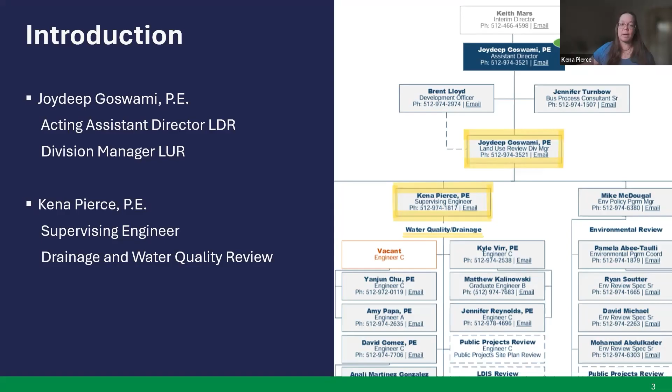More specifically, drainage review for development applications. My team does site plans, subdivisions, zoning, building permits, exemptions, site plan corrections - we do it all. I've got a team of about 13 people, if you count public projects and land development... they're called land use people now, not the old LDIS. I can't remember their new name, which is my bad. But I have about 13 people, and drainage is our gig.

So what is drainage review? Basically, drainage review is compliance with Title 25, Chapter 7, which is aptly named Drainage. What we do is we look at all the rules in Title 25, Chapter 7, and we figure out, is your development meeting those rules?

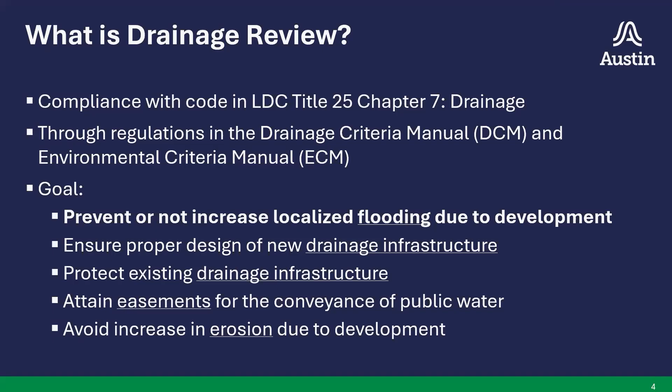Back to drainage review. So we're looking at compliance with Chapter 7, drainage, and a lot of the ways we evaluate whether you're meeting those requirements of the code is through the DCM, Drainage Criteria Manual, and the ECM, the Environmental Criteria Manual rules.

The goal of drainage review is to prevent, and this is really important, increased localized flooding due to development. It's very specific, due to development. We do not want to increase localized flooding. That implies there is flooding. There is some localized flooding in Austin, and we are all aware of it.

We also want to ensure proper design of new drainage infrastructure, specifically public infrastructure, and protect existing drainage infrastructure. We work to attain easements for the conveyance of public water in drainage infrastructure most of the time, and we want to avoid increases in erosion due to development.

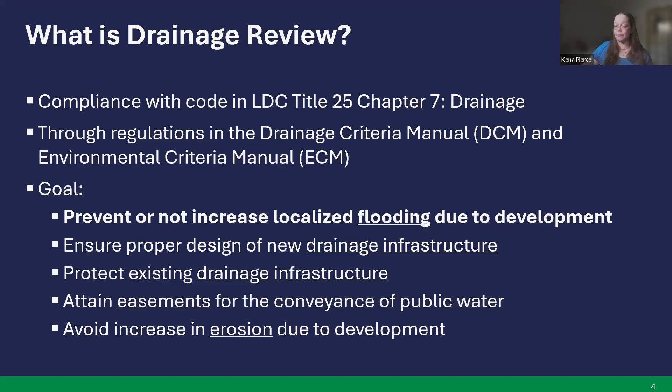This is a lot, right? I'm going to focus on the first goal that I have bolded, basically preventing or not increasing localized flooding due to development, for this particular presentation.

So we're focusing on flooding, and you're like, how does flooding happen? Well, this is the Development Academy, so most people are here because they understand that when you develop a property, you're going to build something and increase the amount of impervious cover on the ground. Most of the time - sometimes you can redevelop a property that already has impervious cover, but we're going to talk mostly about increasing impervious cover - that results in a lower amount of water infiltrating into the soil, which causes water to come off the site in greater quantities and at greater speeds.

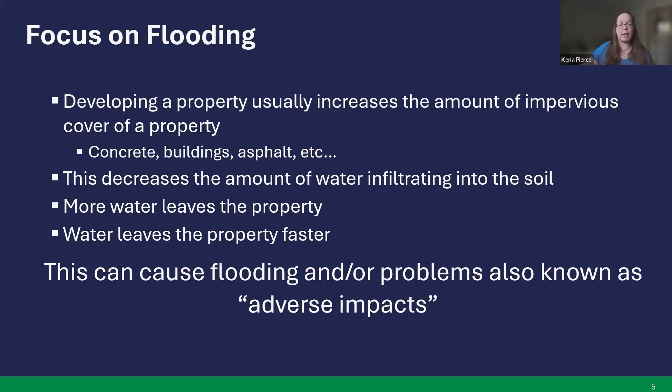Drainage review is pretty complicated. I just wanted to point out, there are some other groups that do something, and you're like, isn't that also drainage review? Yes. There's floodplain review. So if you have a property that has a floodplain on it, which is basically a creek with 64 acres of drainage area, that's another team that reviews that. My team coordinates with them, but that team is floodplain review, and they're housed in Watershed Protection.

There's also the Regional Stormwater Management review team, also housed in Watershed Protection, and we have to coordinate with them a lot. But all of these teams, we basically regulate drainage using the DCM and ECM. So it can be a bit confusing, but if you don't know who to email, email me and I'll send you in the right direction.

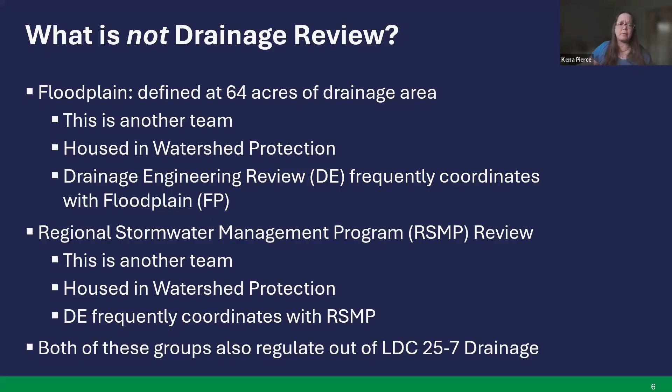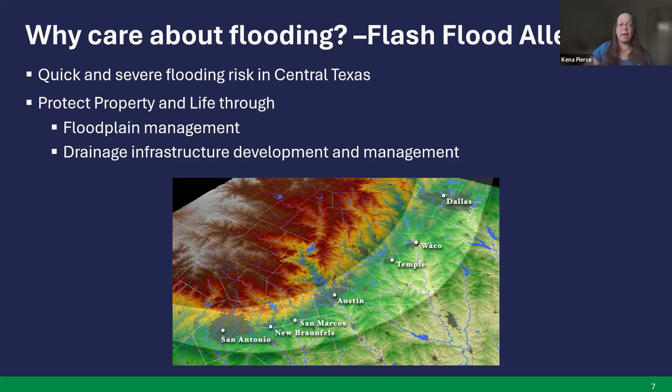Why do we care about flooding? We care about flooding because we live in Flash Flood Alley. This beautiful town we live in has steep topography on the west, which causes water to move really fast downgrade. We also live in an area where we have these really intense rain events - we get a lot of rain in a small amount of time. This quick and severe flooding risk has an area in Texas called Flash Flood Alley. We really want to make sure we're protecting property and life through managing these storm events, managing floodplains, and making sure we develop in a responsible manner to where we protect property and life.

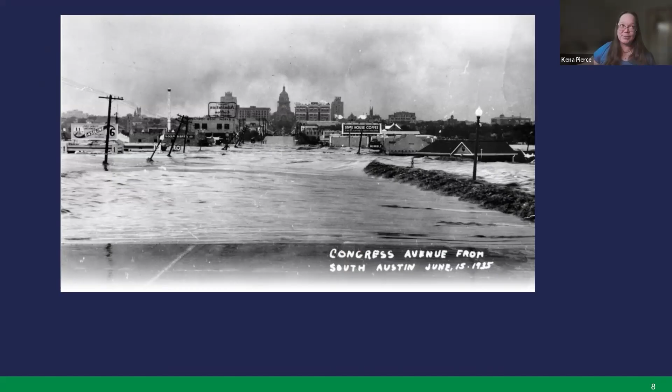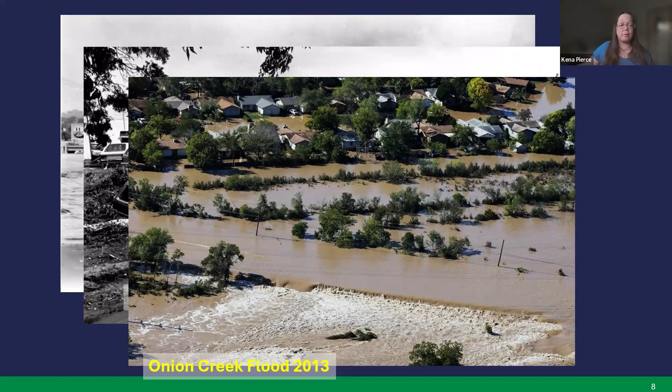There's just some pictures you've probably seen before. This is South Congress during the flooding event in 1935 - looks completely different from today, right? This is, I believe, Shoal Creek and the '81 Memorial Day floods. And then this is one of the big ones in 2013 in Onion Creek. So we have flooding in this town, and we are very, very serious about doing our best to protect property and life through our regulations.

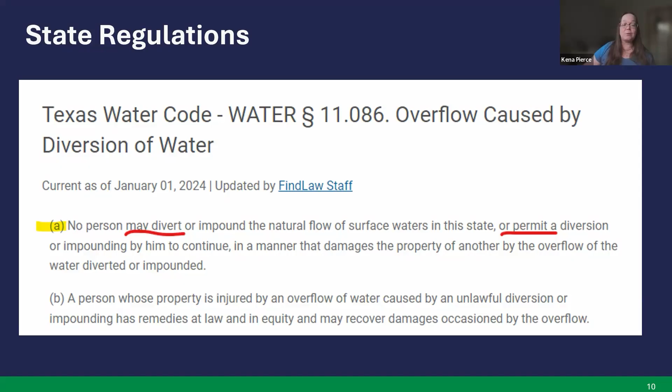You also can't permit a diversion or impounding, right? So that leads us to our city code. We have the state code, and now our city code. The county has code too - all the counties also have code.

The big one in chapter 7 for us is 61, which is specific criteria for the development applications. There's a bunch of stuff in here. I'm going to hone in on no adverse impact and decrease flooding, so I'll look at A5A: the development will not result in additional adverse flooding impacts on other property. That's where I'm going to hone in for this entire PowerPoint.

So that's the big one. This one has been in play, I think, since the 70s. It may not have always looked like this, but we've had some sort of version of no adverse impact for all development applications since the 70s.

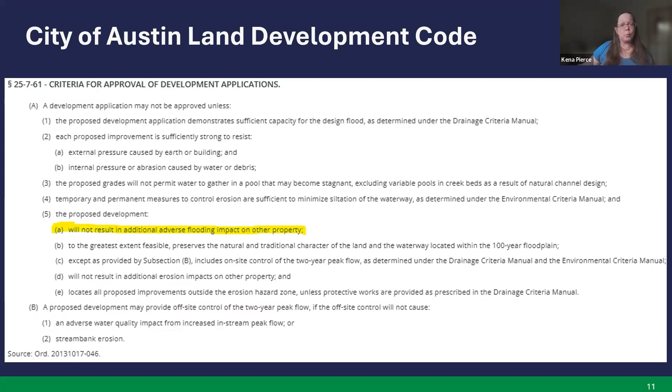We had a new one instituted this year, very specific for residential infill - that's 25.767. If you are residential infill, you might not need to meet all the code and criteria in 25.761; you might just need to meet 25.767. Both 25.761 and 25.767 are very specific for your property.

So if you are infill, and I'll talk about what that is later, you might be able to be reviewed under 25.767. Both of those are for on-site.

You're developing your property and you can't flood other sites from your site after you've developed it. Then we have another one we really look at to prevent flooding - basically you have water coming through your site and you have to allow it to continue through, because this prevents flooding upstream. We don't want flooding resulting from your site, nor do we want your site to cause flooding upstream because you're blocking development.

So that's 25.7.151, which basically says that if you have water coming through your site, you have to allow it to flow through your site. And you're going to have to give an easement because it's considered public water.

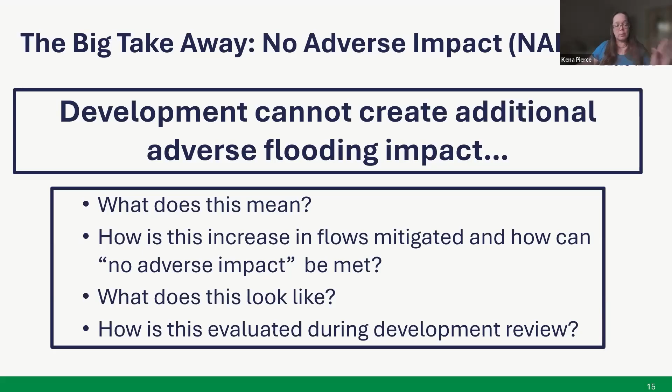And you're like, okay, I just want to build a house - what does this mean? How does this increase flows from your site? How are these flows mitigated? And how can I show that I'm not causing adverse impact? What does this look like and how is this evaluated? So I'm going to go through these 4 questions.

So what does this mean? Again, a development cannot increase flooding downstream, upstream, or from their site. Number 1: a development cannot increase the flow or the timing of water leaving your site. So we're going to look at your site, see how much impervious cover you're putting down, and you're going to have to mitigate and make sure you do not increase the flow or timing from your site.

A development cannot block flow upstream that goes through the site in existing conditions. I mentioned this one before - if you're putting stuff down on your site, you can't put a big retaining wall and block the water coming through, which would either back up onto that property and cause flooding, or the water goes downhill and around, causing flooding on other properties that originally didn't have water on it.

So that's the upstream. Finally, once you do develop your property, how do you discharge it in a responsible manner to not create adverse flooding impacts? So we're going to look at it from on-site, upstream, and downstream. I just have examples here in case this is the first time you've ever thought about water leaving your property and where it goes.

So basically, water's now leaving. Say after development, if water is now leaving to a different property where the water didn't go before, then you're causing adverse flooding impacts. Like, I have a house, they built a giant house next door - never happened in this town before. Now the water from the house next door is being pushed onto my property because they changed the grade. That's an adverse flooding impact, right?

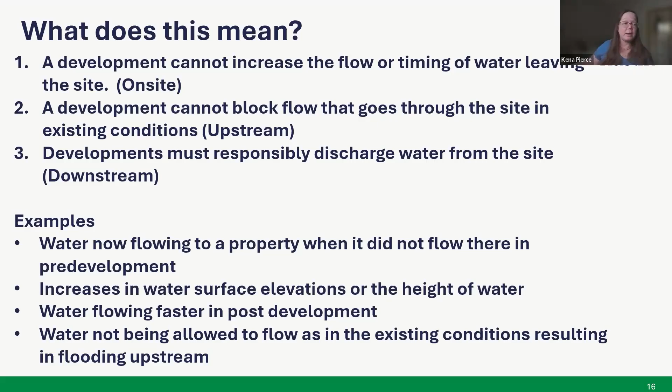So what do we do? We regulate development through these - these are the 3 main ones in chapter 7 of the Land Development Code. 25761, which basically applies to every development except qualifying infill. And then the new one, 25767, which only applies to residential qualifying infill - I didn't put that in there. And then we have the upstream one, 25-7-151.

You're like, all right, I know the rules. How do I figure out whether I'm following these rules, or how to mitigate for my increase in flows? Because I know it's going to happen - how do I mitigate for it?

So for 25761, the rules are there, but you have to go to the drainage criteria manual for some ideas on how to mitigate. For 25767, our new one, the rules are actually right there in the code, and they're also going to be added to the drainage criteria manual - we're in the process of doing that. And for 25.7, 151, the rules are in the code.

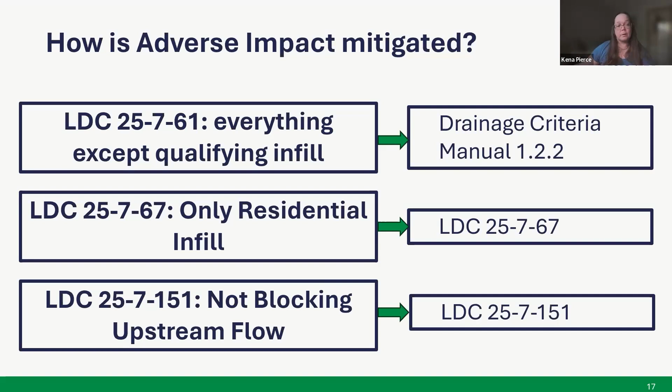So we're going to look at these three. And we're going to start with residential infill because it's kind of the easiest and most simplified, and it really applies to the least number of developments because you have to be considered residential infill. And that is defined in the land development code in chapter 1.

There's a whole section of definitions, and this is definition 97. It says residential infill project means a development of a site not exceeding 1 acre - that's the first rule. And then you have 5 to 16 dwelling units. So: 1 acre, 5 to 16 dwelling units.

Or you can have 1 acre of a re-subdivision property, which has to be zoned SF 1, 2, or 3, is already platted, and does not require a vacation.

So these are super specific. They are not going to - the gas station that's going to go down the street is not going to meet these, right? The new big box store, the new HEB, they're not going to meet these.

These are very specific for like, maybe I own a house - it's an SF3. I want to come in and build another house, but I want it to be on its own lot because I don't want to have an HOA. I could be considered residential infill according to this definition because my property is already platted, it's single family 3 zoned, and I don't require a plat vacation.

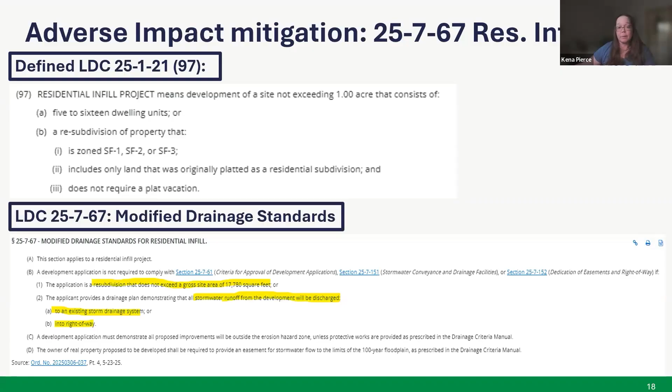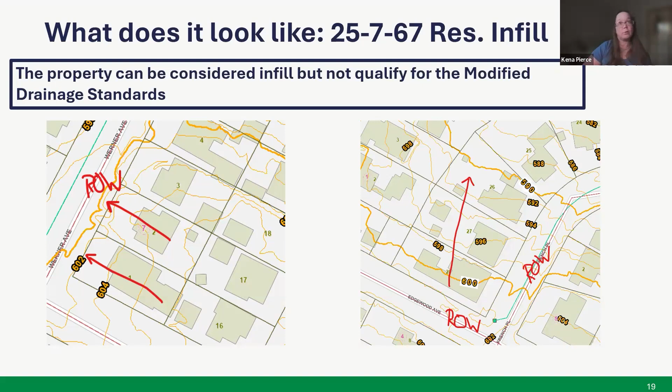Let's look at an example. This is super helpful for someone who wants to subdivide their property and build a house for a family member. This is easy because you don't require an engineer - all you have to show is that your property is graded for the water to go to the road, and that's what we have on the left. Say this is my property and I want to subdivide it and put two houses there, and my water is already flowing to the road. In my development application, I'll have a grading plan showing the water still flows to the road. If I can do that, I qualify for the modified drainage standards, and I don't have to provide any other mitigation to show I'm not creating adverse impacts.

I put detention here - usually detention, like holding water on your property, is what you do to prevent adverse impacts for a certain period of time, and we'll talk about that later. So that's great for me - I don't have to pay an engineer, that's amazing. But what happens if my land doesn't slope towards the right of way?

That's what we have on the right. As you can see, these orange lines are contours, and this red arrow is how the water flows. Water flows perpendicular to the contour line at a right angle. So if I'm this house on the corner of Edgewood and French Place, my water flows to my neighbor, not the right of way, and my neighbor's water flows to his neighbor, not the right of way.

And if I wanted to come in and redevelop this property and subdivide it, unfortunately I wouldn't be able to qualify at this time, looking at these contours, for the modified drainage standards, because I can't show that my water is going to the right of way or other public drainage infrastructure - it goes to my neighbor, and that's private property. So in this case, on the right, we're going to have to mitigate for the fact that I'm increasing the flow, quantity, and possibly timing of water from my site. So I'd have to probably do something like provide detention.

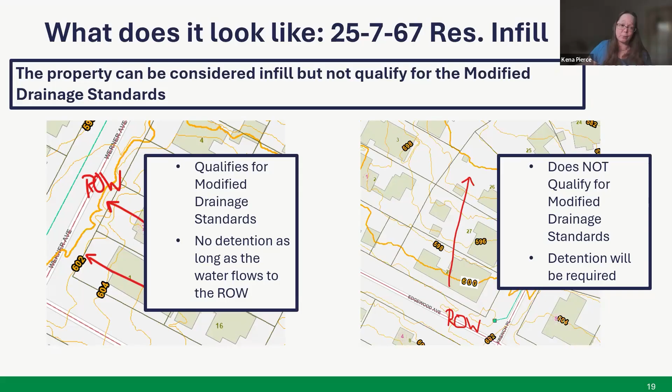So that is the simplest, basic drainage regulations we have. It's very specific for residential infill. Not all residential infill actually qualifies for it. If it doesn't qualify, lucky you, you get to fall under 25-7-61. This is much more complicated, and it basically applies to all development - you're going to need an engineer to come in and sign and seal things.

Just making sure she's not texting me.

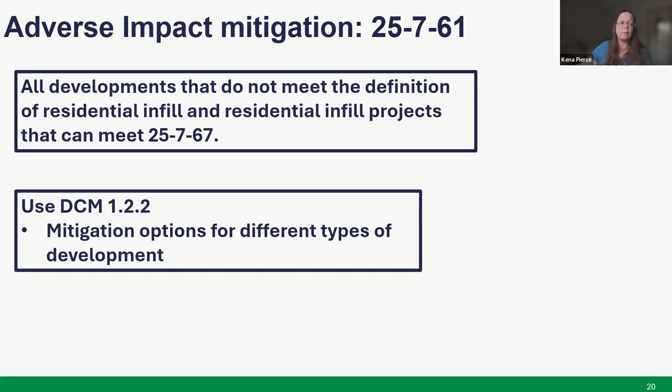So basically, all developments that do not meet the definition of residential infill, and residential infill projects that cannot meet 25-7-67, all have to show no adverse impact under 25-7-61. So basically, you cannot cause adverse impacts. How do I do that? You're going to go look in the DCM to see what your options are - these are your mitigation options. Section 1.2.2 is our big important section for this, and it has a bunch of stuff in here, all having to do with adverse impacts in some way or another. For instance, the first one is basically telling you - because I've been telling you, you can't increase water from your site - well, how do we quantify that water?

Do we have any standards for that? Why, yes, we do. You have to look at the different storms, and you have to show that these storms are not causing adverse impact. These storms are the 2-year, the 10-year, the 25, and the 100-year storm. These are basically standard wherever you go get a permit, whatever city, whatever state.

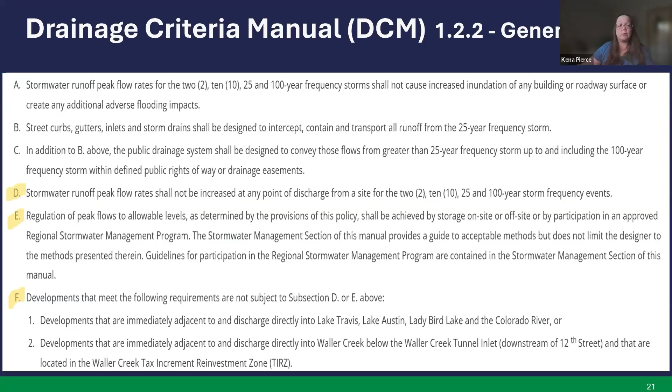These are the standard storms a lot of people use if they have flooding issues and regulations. This is kind of conceptual, but basically you have a certain amount of precipitation you use to model the 2-year storm, a larger amount for the 25-year, and of course the 100-year is the most precipitation. You put it in your model and figure out how much water is coming off your site. So these are our regulatory storms.

Just to note, the 2-year storm is way more common than the 100-year storm. I think the 2-year storm has a 50% chance of happening, whereas the 100-year storm is a 1% chance. I don't know if you've noticed when you drive around town and see detention ponds after the rain, you're like, it's not full, is it doing its job? Well, most likely we didn't get a 100-year storm. But our ponds are designed to hold that big storm because that's the storm we've decided we're going to regulate to.

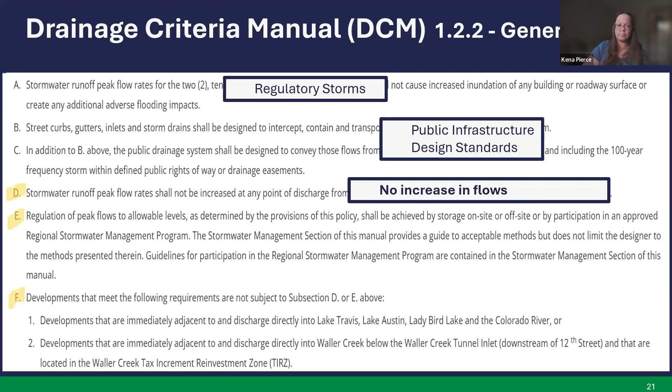B and C are rules about public drainage infrastructure, so I'm not going to focus on that too much, but I will focus on D. This is our really important one, and this is basically how you mitigate for your development. You can't increase the flows being discharged from any point of your site. We just call it no increase in flows. So this is what you have to do to meet the no adverse impact standard in the land development code.

Section E gives you the option. You can mitigate with a detention pond or by participating in something called the Regional Stormwater Management Program. For detention ponds, it says on or off site, because some developments have their own pond and some belong to a larger group of development with a common pond, and then sometimes there are really large regional ponds.

So, no increase in flows - you have to mitigate with a detention pond or by participating in RSMP, which I won't go into too much here. Or you could be special, very special, except in these special geographic areas. In these areas, you don't have to provide detention because your flows leaving your site aren't going to cause any adverse impacts. That's along the lake somewhere, whether it's called Lady Bird Lake, the Colorado River, or whatever else that beautiful body of water going through town is called.

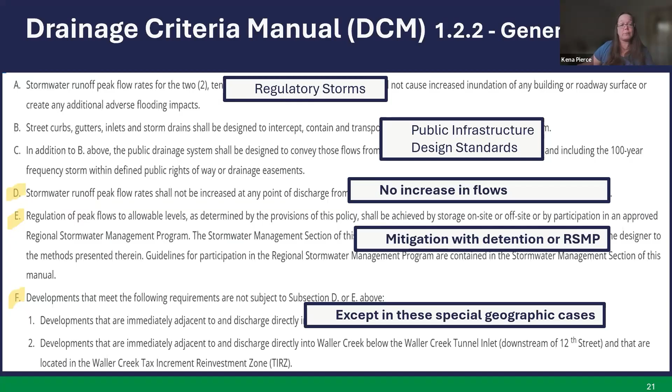If you're in a certain area in the Waller Creek watershed, which is downtown, we have a giant tunnel they spent millions of dollars building, which is sized to take your flows so you don't have to detain. And then the modified drainage standards are also going to go under section F in the future.

I wanted to put this in here, this is G and H - just so I didn't want to forget it, because it's part of 1.2.2. Section G is about the Regional Stormwater Management Program. That's not my group, I'm not going to go over it. If you want more information on this, let us know.

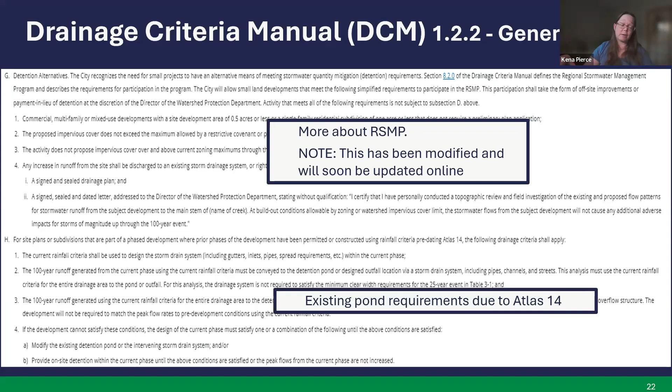And then H has to do with Atlas 14. In 2018 they came out with new precipitation data that we now have to use - it started to be in effect in 2019 for floodplain, and I think spring of 2020 for drainage. If you have an old pond, you need to look at H, but I'm not going to focus on that. What I'm focusing on is no adverse impact.

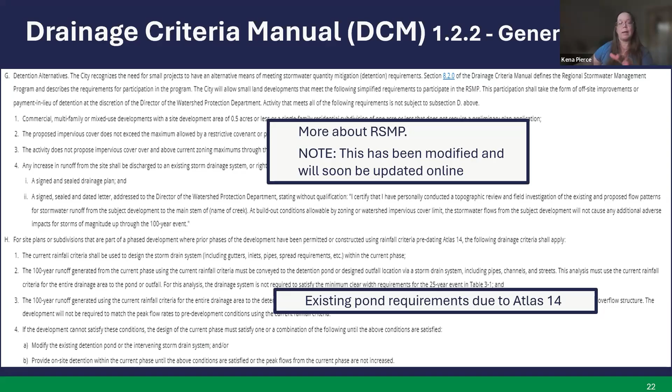25-7-61 comes to the DCM 1.2.2 to figure out how to mitigate it, and you're like, okay, what does this look like? So basically, I have this beautiful development off of William Cannon and Mopac, and I put a bunch of impervious cover down. So I am definitely increasing the amount and velocity of water leaving my site. So what do I do? I pop it into a detention pond, because that was one of the options - a detention pond to hold the water and slow it down, and then slowly release it to the public drainage infrastructure.

This one also has a water quality pond. I know some of you know that I also do water quality, so I had to mark it in here. But the detention pond and the water quality pond are shown in this GIS map, that's the big one my group looks at most of the time. I put in RSMP for completeness, but I don't have a picture because it's hard to picture that.

And the last one, I'm in one of these special areas. I'm on the right, and I can just release my flows because that's no adverse impact in these special areas.

So I just showed these developments along what I think is the Lady Bird part of the lake. As you can see, this one on the right has this pink water quality pond. All this impervious cover goes to the water quality pond to be treated, and after the water quality volume is done, because you only have to treat a certain amount, the rest just goes to the lake. You don't have to detain it at all because the lake is not going to be really affected by that small amount of water, right?

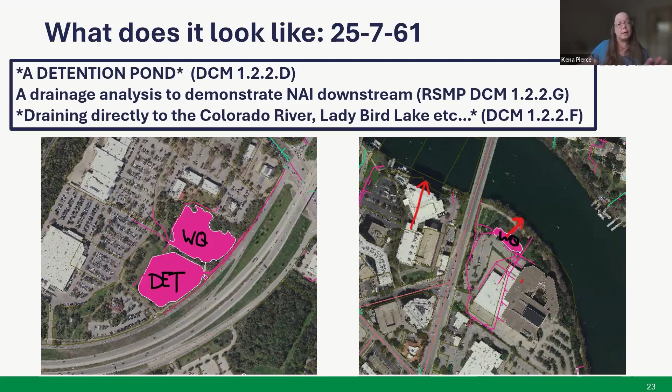So that's what's considered no adverse impact, and those are under 1.2.2.F. Everybody else has to meet 1.2.2.D, which is no increase in flows, and provide some sort of detention pond, unless you're doing RSMP, which I'm not talking about in this PowerPoint slide.

So that's your on-site stuff. We went through residential infill, on-site, 25-7-61, which is on-site. And this is just a little bit of the upstream stuff. I just put the same code in here, but I wanted to give you a picture. So again, if you remember, you can't block the water upstream.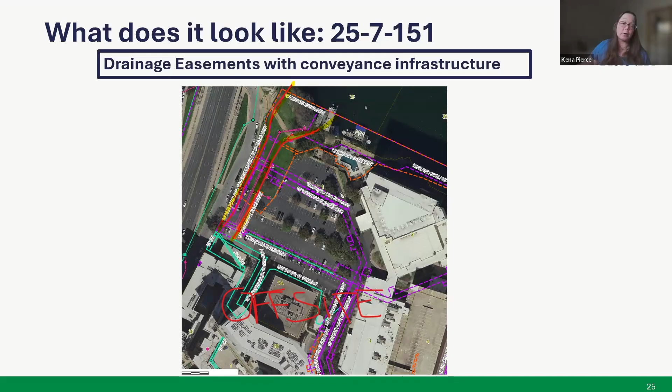So that's a lot, those are the rules. Well, I'm in for development, how are these rules evaluated? What do I have to show you, Kena, to make sure that we are demonstrating that we have no adverse impact? And the big way you do that is through using drainage area maps.

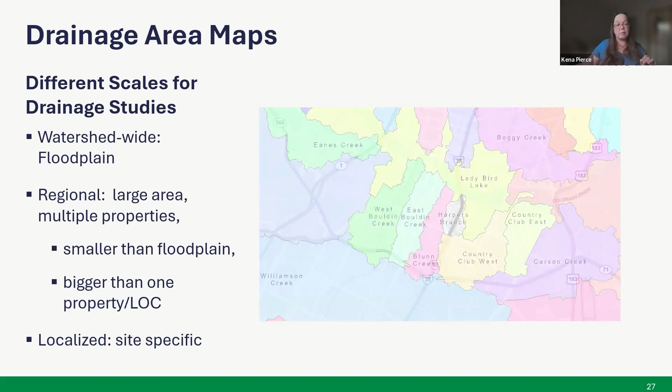This is an example of just the watersheds in the city, not all of them, but a watershed is basically an area that flows to the same end point. So we have drainage area maps, and that's kind of what we want to know, but we mostly want to know it for your site. I wanted to put in here that there are different scales of drainage area maps. This one right here is like on a floodplain wide scale, right? All of this water in this light blue shape is for East Bouldin Creek, and it flows to East Bouldin Creek into Lady Bird Lake.

You can also have, for development review, depending on your property, you might need to show a larger drainage area map than just your site because you have off-site flow. So this is an example: the yellow is a little park up in the Lakeline Mall area, and that's the site. But in this case, we have all of this other area where the water flows to a creek and that creek goes through the park. So this is more of a regional approach.

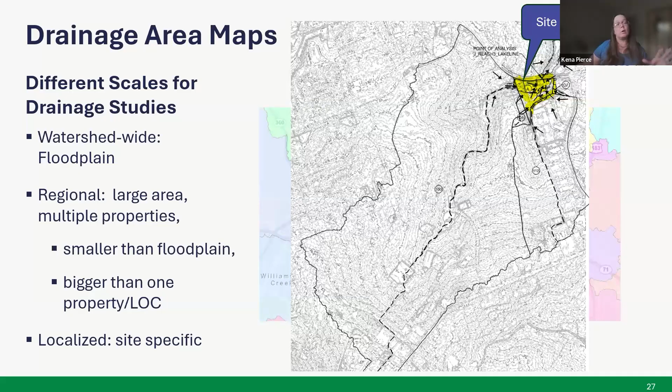So if you were to just turn in just the site, this is your on-site drainage area map. It's really dependent on the property what kind of map you need to turn in. We always want an on-site drainage area map. Don't turn in a floodplain drainage area map for us because we're not going to know what to do with it, right?

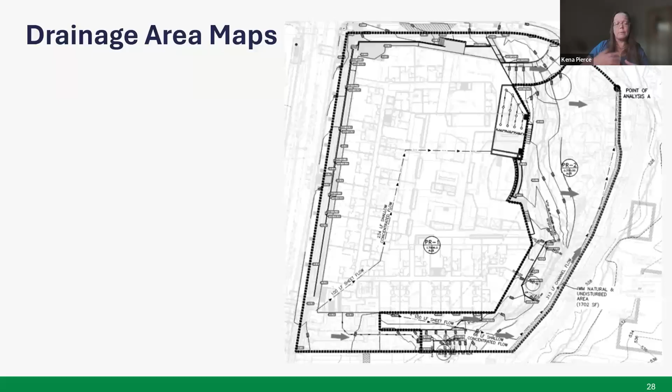We always want an on-site drainage area map for my review. If you have off-site, you also need to show that. And if you don't know what drainage area maps are, or don't know much about it, that's fine—this is an example of a drainage area map.

They should have contour lines. They should have drainage areas, like a common area that flows to the same point. We kind of conceptualize everything at a point, which might not really mimic what goes on in the real world, but that's one of the ways we do it.

It quantifies how much water. Usually there's a bunch of calculations on here, and they show the amount of flow coming off at point of analysis A—10 CFS, right?

They can demonstrate the limits of the flow of water. They show the different surface materials. You don't see it clearly on this one, but you can kind of tell that this big area, PR1, is basically impervious cover. This area along the east side is more natural because they have a creek running through here.

It shows your piping systems, your ponds. This is a pond in kind of the middle upper right. And we use these to figure out how big your detention pond needs to be—how much water you need to detain on your site and slowly release in order to mitigate for your flows.

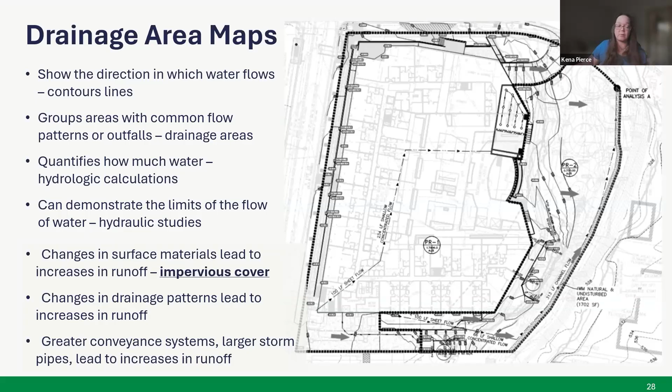Yeah, you need an engineer to do this. They have to stamp it, sign it, seal it, and run an electronic model, especially if you have a pond.

A special note—I keep saying impervious cover. Impervious cover is things like buildings, asphalt, concrete, anything you can drive on. We have a special caveat in 25-8, the environmental section, that certain types of impervious cover just don't count—that's not for drainage calculations, that's a special water quality thing. But for drainage calculations, if your surface does not allow water to infiltrate, it's considered impervious cover, and you need to put it in your drainage area maps.

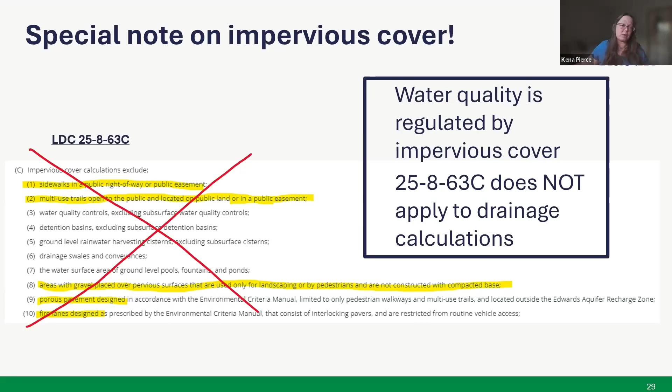That's just something we frequently get questions on. If you have more questions, you can email me, not a problem. I wanted to put that in here because it's often an area of conflict, especially with sidewalks—yes, you don't have to treat the sidewalk for water quality purposes, but it's still impervious for drainage calculations. So you might have to somehow mitigate an increase in flow.

Very unpopular, right? That's not my fun part of the job. So let's look at easements, because I want to include it for completeness.

I understand property owners are like, oh, I don't want to have an easement. I completely understand, because that easement has to be big enough that the city can come in and maintain the infrastructure, and you can't put anything in it—no buildings. You can sometimes put parking lots over it, but any sort of vertical structures, dumpsters, retaining walls—that stuff gets in the way of maintaining the infrastructure in that easement, and you can't put it there.

This comes up with residential housing too. You go in and want to maybe increase the size of your house, and you've got an easement. On my own lot, I have a cable easement, and a gas line easement in the back, which severely limits what I can build on my site.

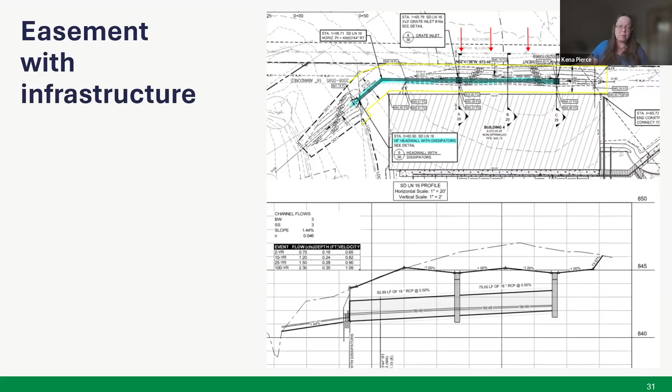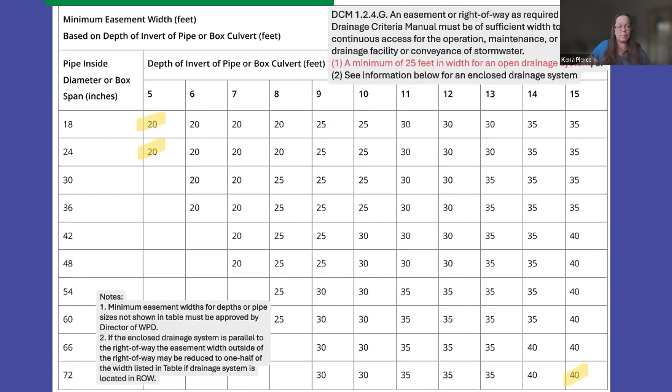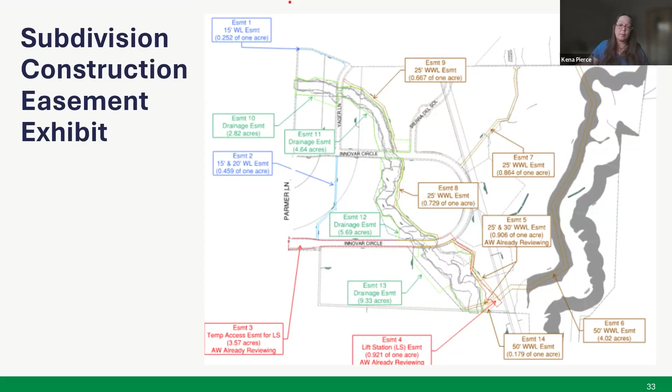So we're going to look a little bit more at detention ponds. I know I need to wrap this up fast, so I'm going to go a little quicker. So, no adverse impact—I'm going to hone in on detention ponds here.

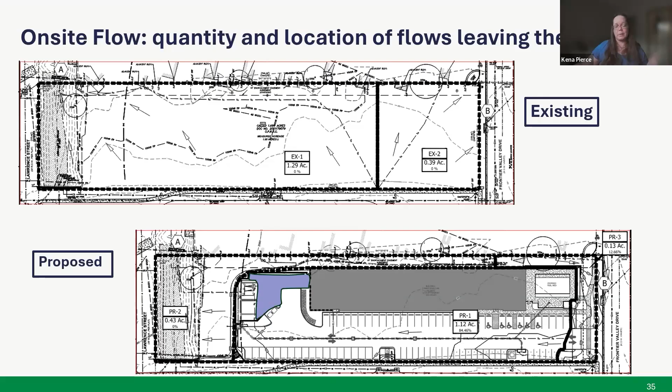But you're like, what's a detention pond? It's basically a storage basin that impounds a volume of water with a controlled, metered outlet. That's really important—you have to control how fast and how much water leaves the pond. We don't have a lot of very specified rules for detention ponds, we leave it pretty open, but it has to be a big area that holds water with a metered outlet. You have to demonstrate that all the water that needs to get there from your site can get there.

So some examples are just basically a big hole in the ground. You might not have noticed, but you might notice now when you drive around town, there are a bunch of detention ponds everywhere, and they take up space on your site. You want to develop your site, that detention pond is going to take up space, but it's also going to keep your property and your neighbor's property safe from flooding impacts. Other things—if you want to save space, you can do subsurface detention ponds.

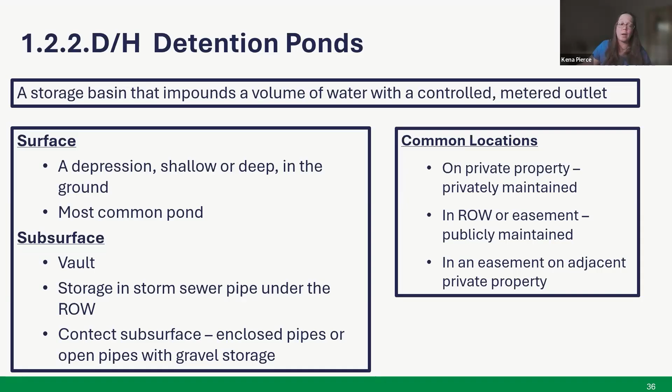Private property has detention ponds. Say I'm a city worker and I need to widen South First Street—I'm going to have to provide a detention pond most likely, especially if it's an area that's all green, because I'm increasing impervious cover. I don't get out of this because I'm the City of Austin; the city has to obey the same rules. So we'll have to provide a detention pond either within the right of way somewhere, or we'll have to get an easement from a neighbor to put the detention pond on. It's very important that you understand the city has to meet the same rules that we expect private development to meet.

So I said the detention pond is pretty basic—we don't have lots of special rules for them. Basically, they need to be big enough to contain the 2, the 10, the 25, and the 100-year storms. They have to empty in 24 hours, because we want it to be empty in case there's another storm the next day. If you do a detention pond, you are required to have an electronic model, and then we're going to look at your outflow structure—what is your weir, how big is it, do you have a pipe? This picture on the right is basically the outflow for a pond. A weir is this square notch, and the point discharge is right there from that pipe.

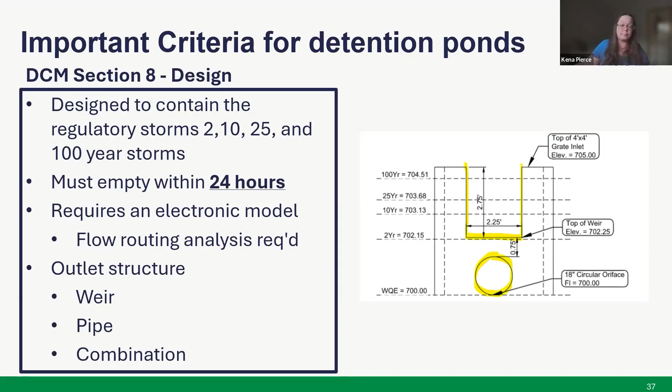So again, I love to look at detention ponds around town. My kid is actually kind of over it, but that's too bad—he needs to see all the detention ponds around town. This is a really big one at that development on William Cannon and Mopac, which I'm quite fond of. You don't have to be, but I am. This is another one—one of the city's detention ponds at a park.

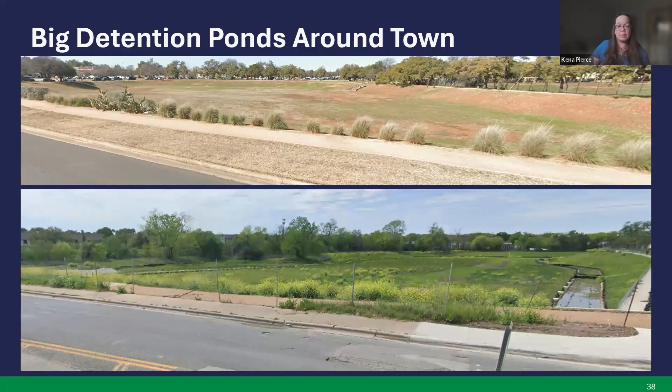You can find them on GIS. If you're wondering, does my Walgreens have a detention pond, you can actually go look it up on property profile. Privately maintained detention ponds are pink, and publicly maintained detention ponds are shown in a green stripy color.

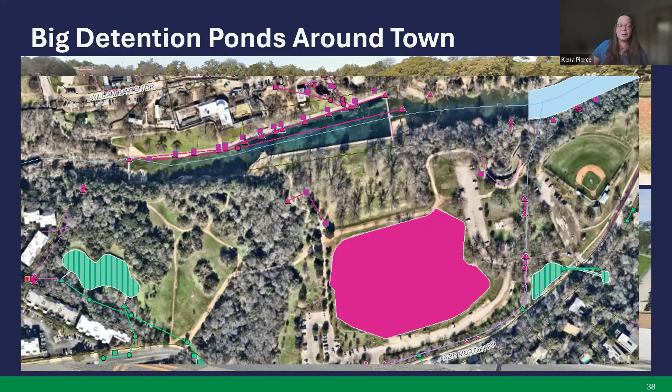This is Barton Springs right here, and this is Zilker up to the top, with the baseball fields on the other side. You might not realize it, but that's in a giant detention pond. Because it's so big, so shallow, and so flat, you don't even notice it until you look at GIS. This is what it looks like from the parking lot. That's a detention pond - it's meant to hold water.

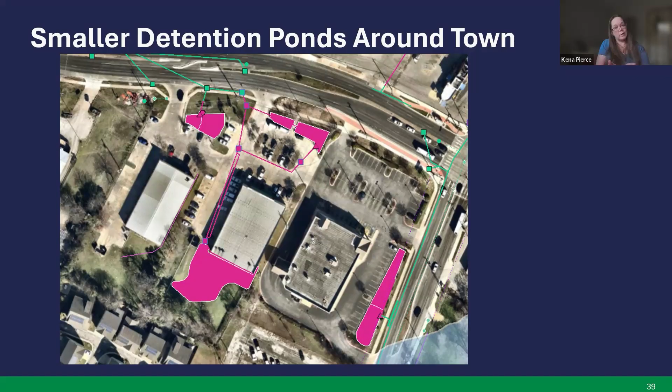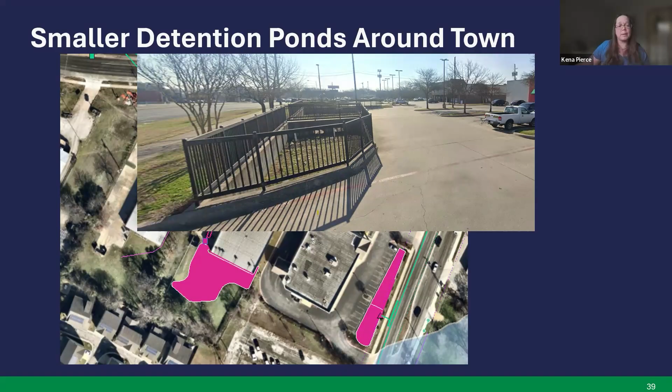They came in for a development application, and we said, you're increasing your flow from your site, so you need a detention pond. They probably also have water quality ponds. This is what it looks like in real life if you're driving by. I didn't even notice these things before - maybe that was my bad, right? But now I see them everywhere.

These are some really interesting ones right here, on William Cannon and Manchaca I think. This little triangle is parking lot detention. So if you park your car here and it storms - a storm large enough to actually need detention - your car is in the detention pond. And we have rules for that, like it can only be an average of 8 inches in depth.

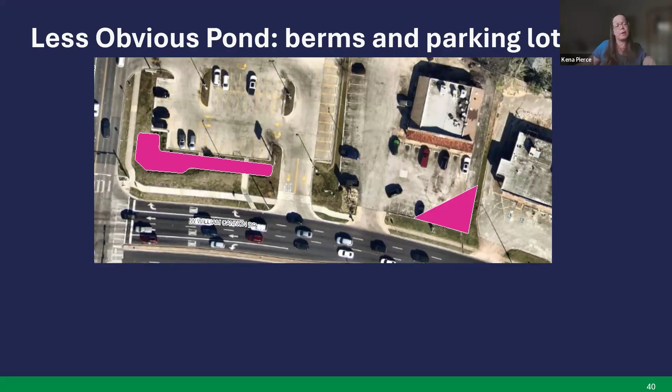They're super interesting. This is Betos I think - this little corner is the detention pond, and this is the outlet right here. This is a little detention pond in front of CVS, I believe. Again, it's so subtle you might not have even noticed it.

One thing I didn't mention until now - we've got upstream, we've got on-site, and how your water leaves the site is very important, that's downstream. Most of the time, if possible, we prefer you to connect to the storm sewer, if the storm sewer is sized for it - please connect. Discharge to a creek or body of water can also be considered like a connection.

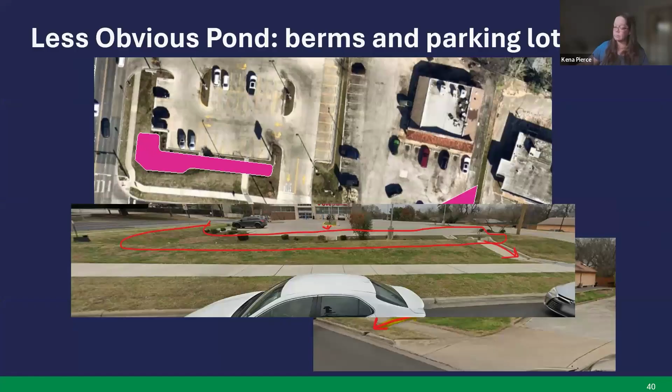Discharging to the right of way, like this pond right here - no, let me find this one. Yeah, this one right here. This goes right into the right of way, and so does this CVS. You can tell right here is the discharge for that pond, this little concrete thing coming out to the bottom. It goes right into William Cannon.

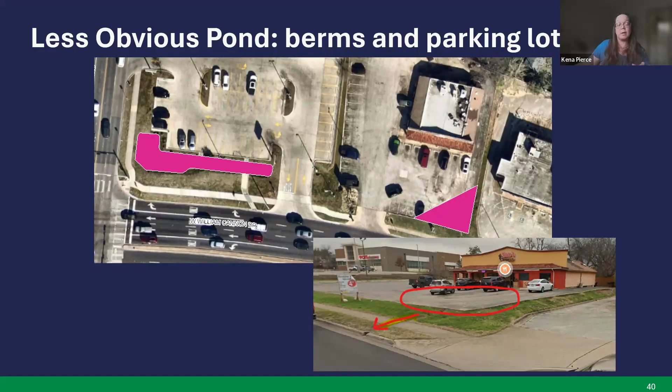There's no storm sewer in this part of William Cannon, so that's part of our job - we need to look at that. We need to make sure it's being released at a rate that's not causing traffic problems. So on some level, connecting to a pipe is the best scenario, because otherwise we're really looking at your discharge and making sure it doesn't cause any safety conditions.

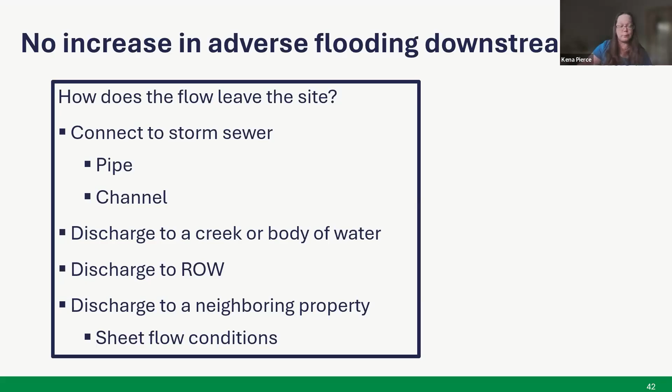Another thing with discharging - if your water flows to your neighbor's property in existing conditions, it's going to flow to it in proposed conditions too, and we really look at that as well.

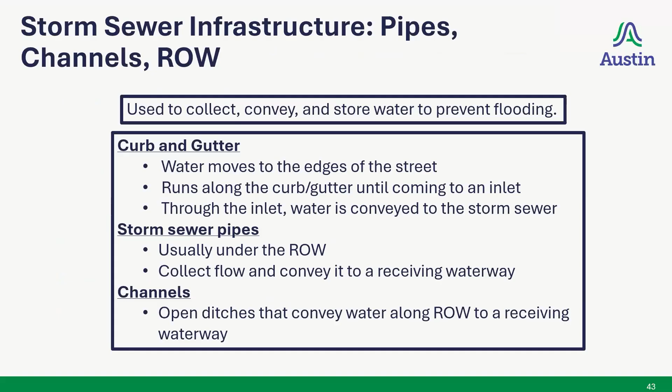I believe I'm running out of time - am I not, Bianca? Yeah, we've got about 5 minutes left, so it's up to everyone here. If y'all have time to stay on, we can still do question and answer.

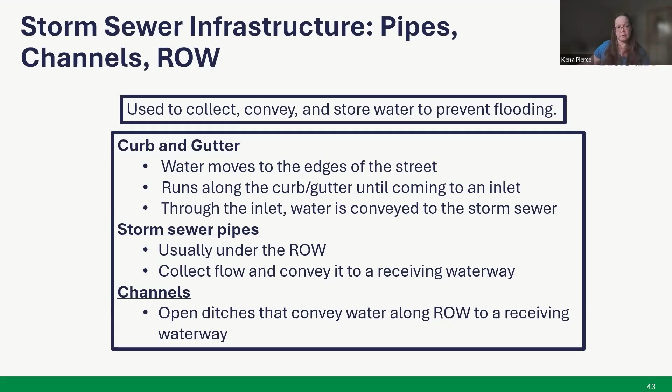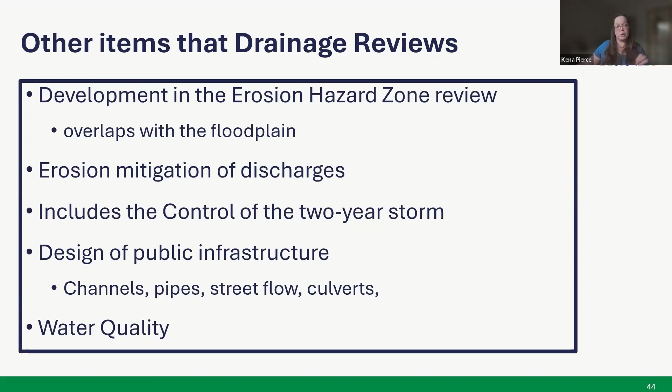I wanted to bring out that my team does other things - we also do erosion hazard zone review, erosion mitigation for storm, public infrastructure, and water quality. So there we go, sorry about that kind of clunky ending. Back to you, Bianca.